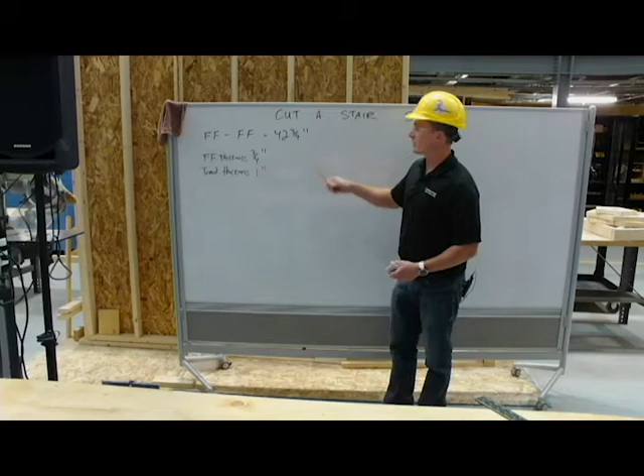Like I always say in the class, I like to draw it out. If this was a problem that I gave to you on a test, I would draw it out so that it makes more sense to me. Then I can write all my information down before I go ahead and do it for real on my stringer, which I got on the bench right here. So let's draw this first, and then we'll go from there.

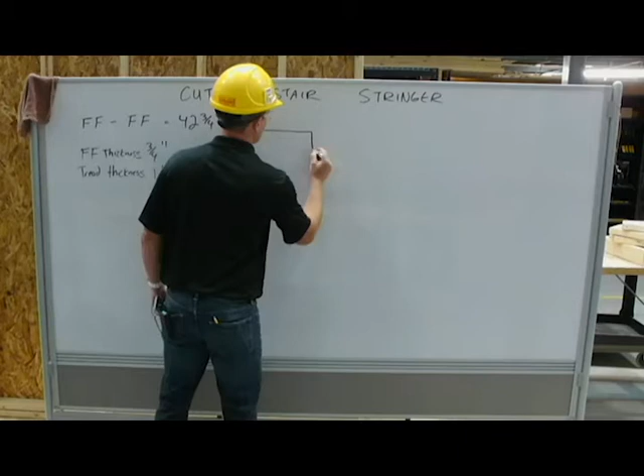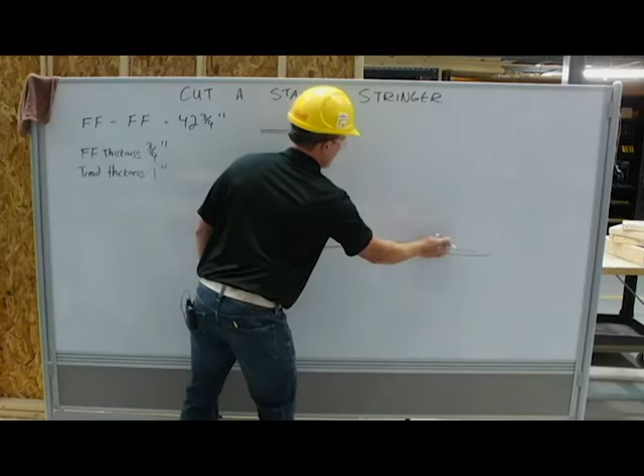So first thing here, here's my floor, including my finished floor right there. And then I'm going down to hit, so this is my subfloor right here, and this is my finished floor right here. My stringer's going to come down and hit down here somewhere. So my measurement is taken from right there, finished floor to finished floor. So top of finished floor to top of finished floor, we got 42 3/4 inches.

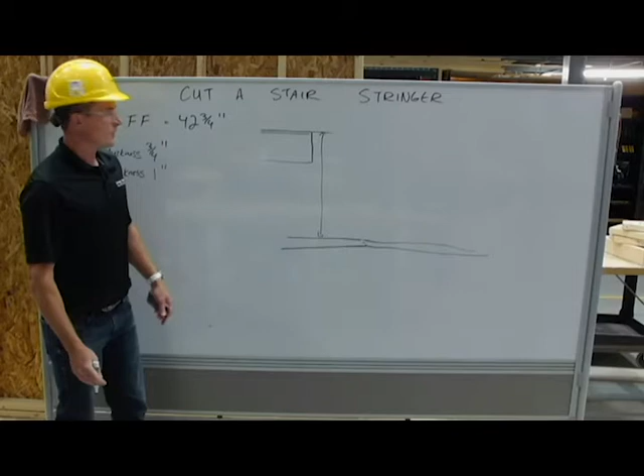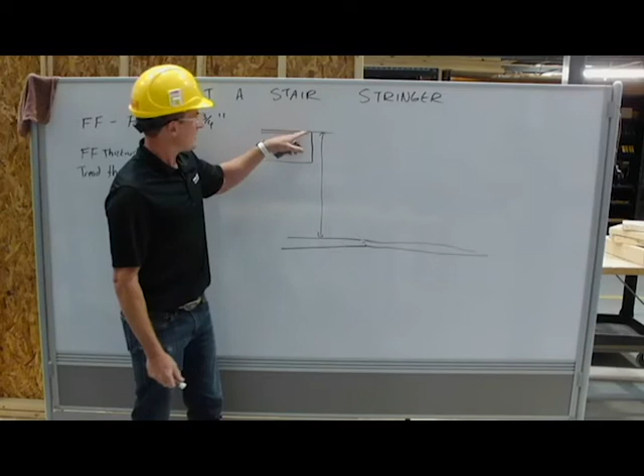So let's start with that as our measurement. And then what we're going to have to do is adjust the stringer for that, because we want the stringer to hit on the subfloor. And then we'll have to adjust for the height of the thickness of our tread.

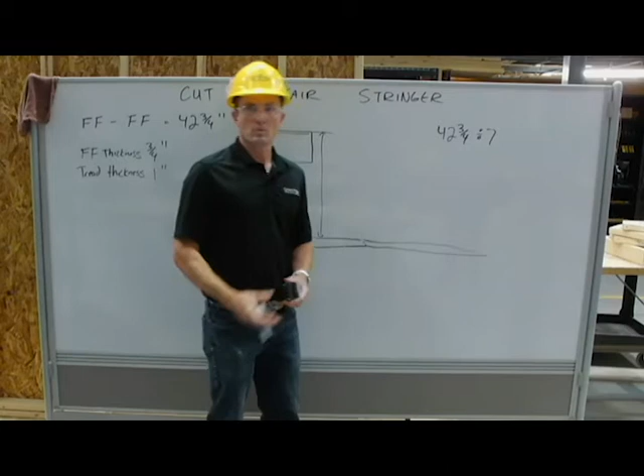So starting with the math, the first step we would do, I'm going to take my 42 3/4 and divide that by 7. Why do we divide by 7? Well, we want to get as close to 7 inches as we can for our unit rise. So I'm going to take that on my calculator and see what I get.

42.75 divided by 7 gives me 6.107. Okay, the decimal place out there, I'm not really too worried about. What I want to see now is that that's got 6 rises. So I want to have 6 equal rises of whatever it works out to.

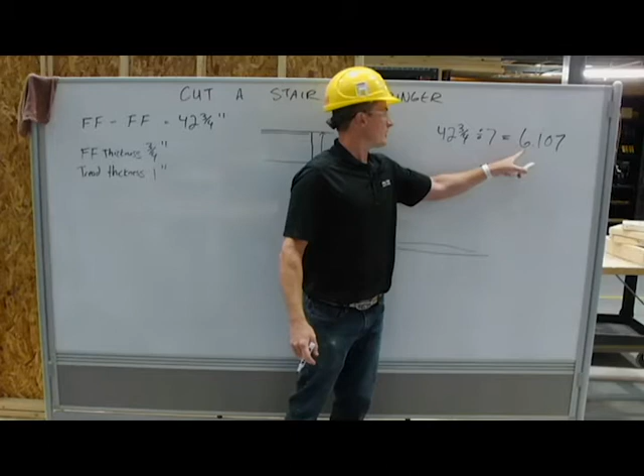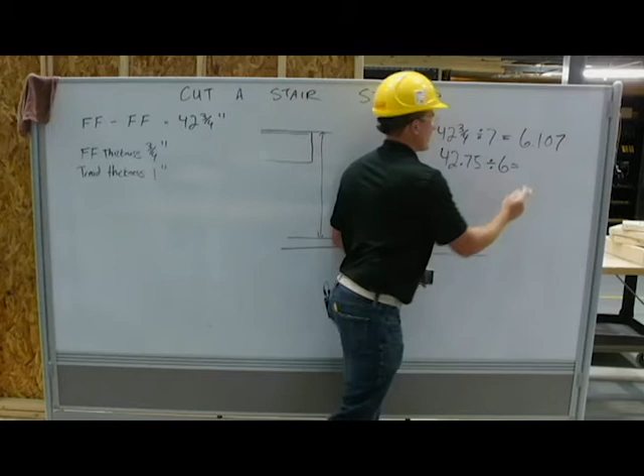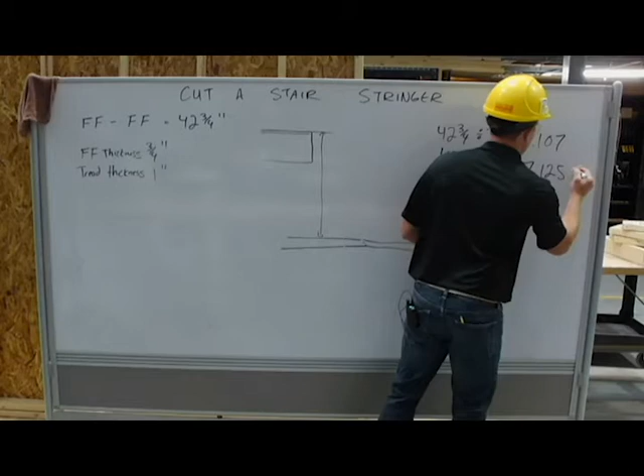So I'm going to take my number 6 and go now with my 42 3/4, 42.75, divided by 6, and that's going to give me what my unit rise will be. So I got 6 rises at how many per rise? I take my 42.75, divide that by 6, and I get 7.125. So each rise is 7.125 inches, and there are 6 of them.

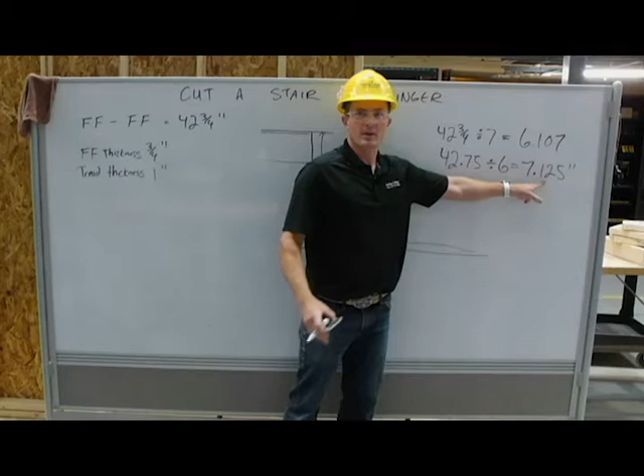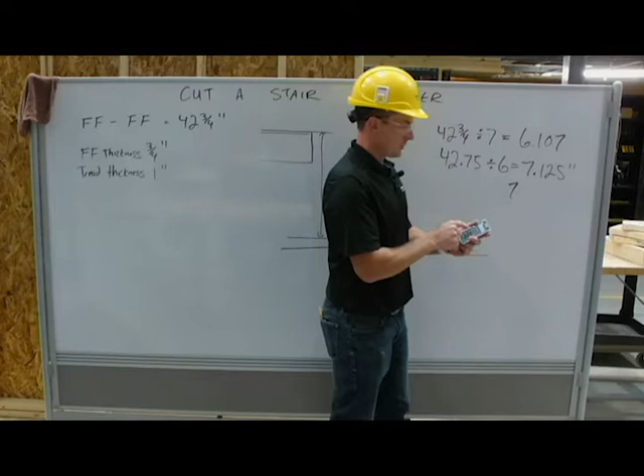So now I would need to convert that into a fraction, which I can actually measure on my board. So I'm going to take my 7 whole inches and take my 0.125 and multiply that by 16, and I get 2/16. So 2/16 is also known as 1/8. So 7 and 1/8 for each rise, 6 rises there.

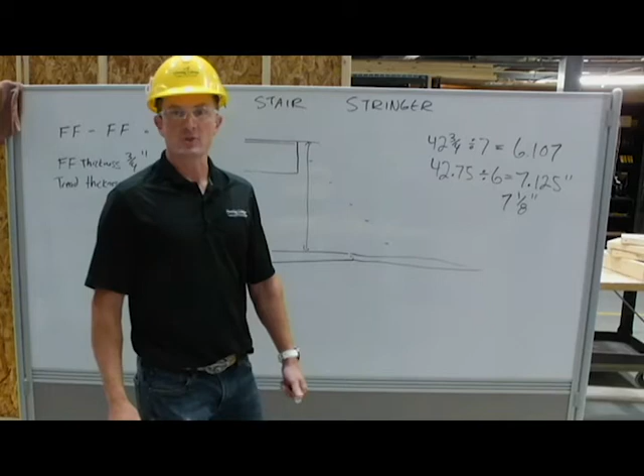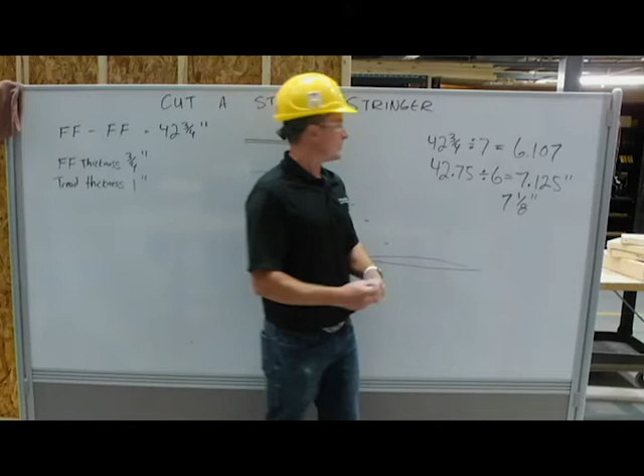Okay, so I want to draw this stringer out here. Like I said, we like to draw this stuff before we do it. And I've mentioned that there are 6 rises, so that leaves us with 5 runs. 6 rises, 5 runs. Okay, so why only 5 runs?

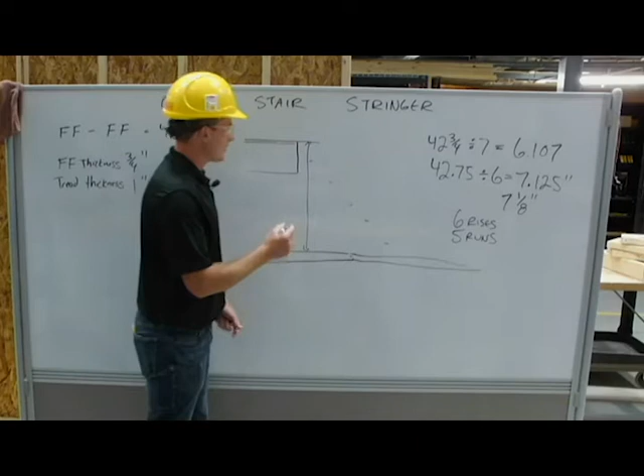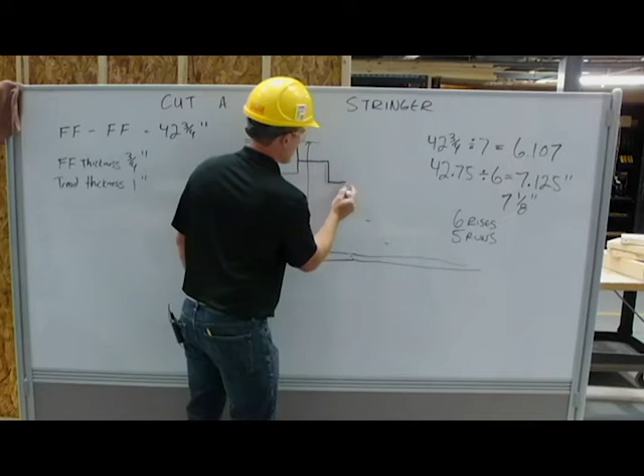Well, let's draw this thing out approximately to scale here so we can see. So here's 1 rise, 1 run. 2 rises... Okay, so now you can see there's 1 rise, 2 rise, 3 rises, 4 rises, 5 rises. The 6th rise takes us right up onto the finished floor right here.

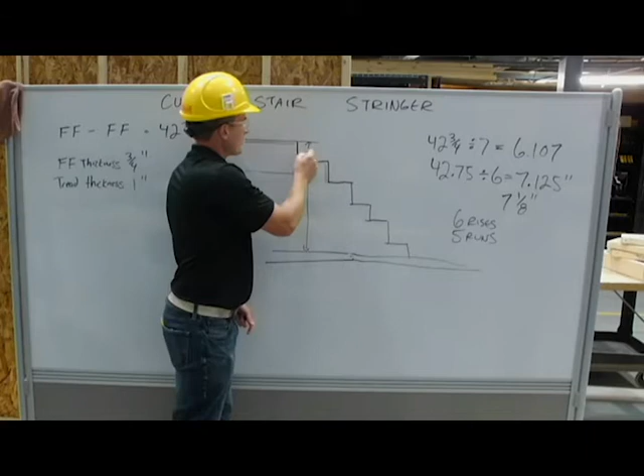Okay, so with that, we don't need a run there, right? I'll take that out there so it's a little bit more clear. So there's 1 run, 2 runs, 3 runs, 4 runs, 5 runs. So 5 treads, because this tread here is not a tread. We just get a nosing at the top at our finished floor height.

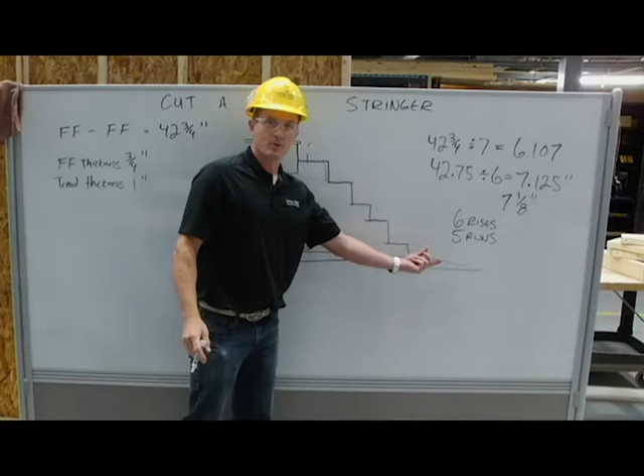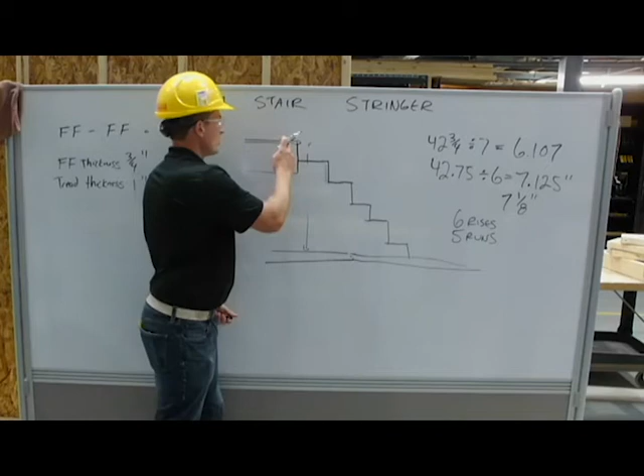There may be a situation where you want to have a run out there. Maybe there's nothing here and there's a landing out here and we got to stretch this out a little bit, but very seldom do we actually have a tread level with the top of the finished floor right there. So usually what happens is we go finished floor, tread, tread, tread all the way down. So now you can see that we've got 6 rises and only 5 runs or 5 treads.

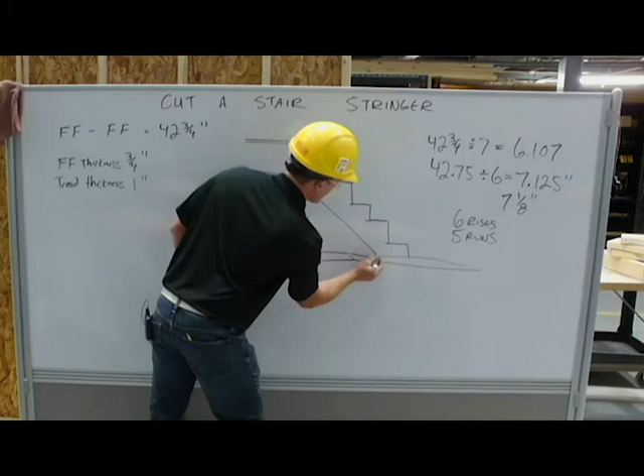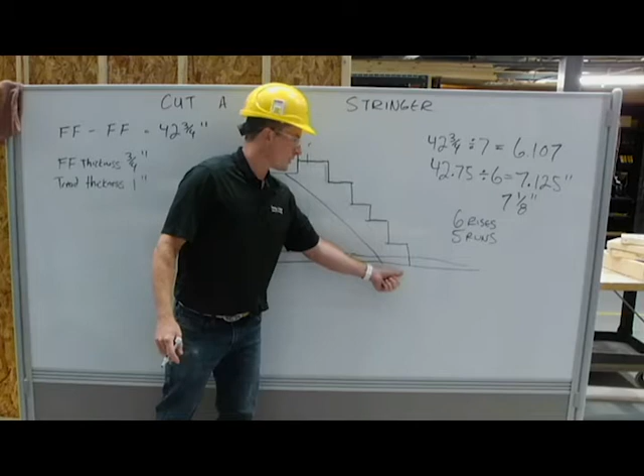This is what we want to lay out. Our stringer is going to go through the finished floor and land on the subfloor. So let's say we're installing this stringer here before the finished floor is down. We want to come all the way down to the subfloor, whether this is concrete or a subfloor down here, it doesn't really matter. But that's where we want to hit before our finished floor goes on top of whatever we're sitting on. So there is our stringer hitting all the way down through there.

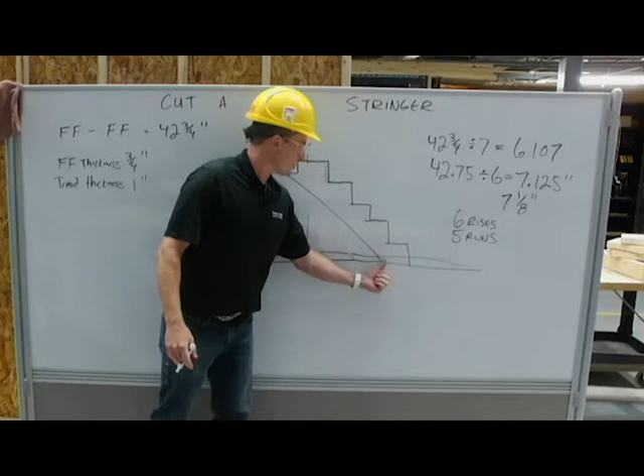All right, so one thing we didn't discuss before we cut our stringer out here is what's the length of our run. So we have a total rise of 42 3/4, 6 rises at 7 1/8 each. So we have 5 runs at what? So we didn't discuss that.

So let's use our rule of 17. The way rule of 17 works, we just take our 17 and subtract our rise from that, and the difference that we're left with is going to be our length of unit run. So 17 subtract 7 1/8 leaves us with 9 7/8. So our 5 runs are at 9 7/8 each.

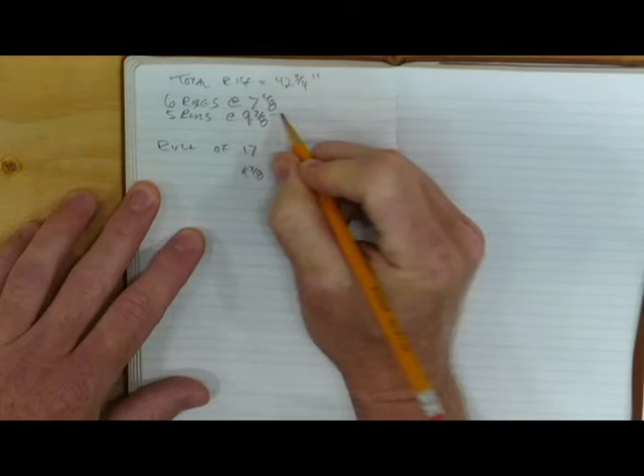Okay, so now we know our 2 numbers that we're going to need to put on our square, 7 1/8 for each rise and 9 7/8 for each run.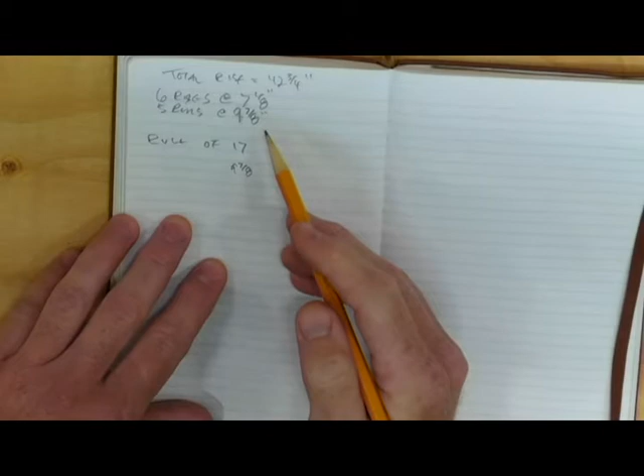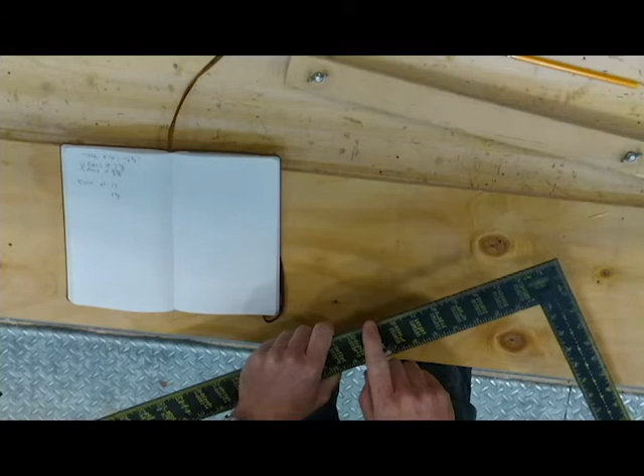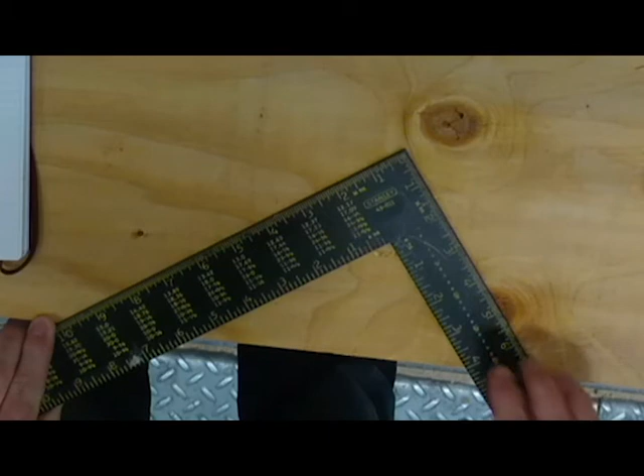So the way this is going to work is similar to laying out a rafter. I've got in my left hand my long side of my square, my level side. I'm always going to have my level part on there, which is my run. So I look at my notes here and I see 9 7/8 is where I'm going to set this side, my left hand on the square at 9 7/8, and my right side is 7 1/8. I'm going to slide that along at 7 1/8, making sure that it's lined up.

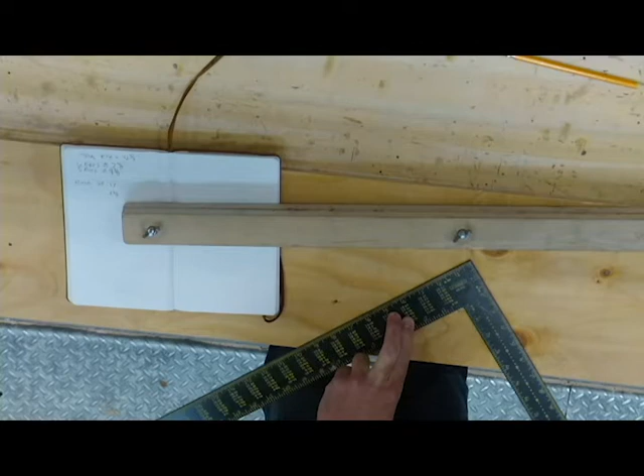You can just hold it and lay out that way. You can put your little square nuts on there, your square dogs or whatever. I like to use this guy right here, and the reason for that is I can slide off the end farther than if I had just my square nuts on it. It allows me to put a run right at the end of my board.

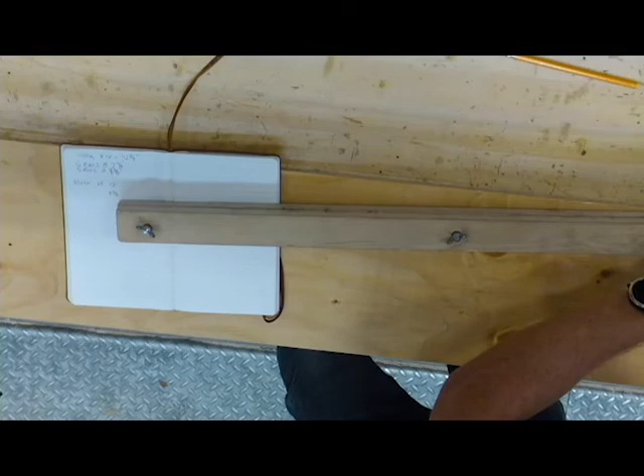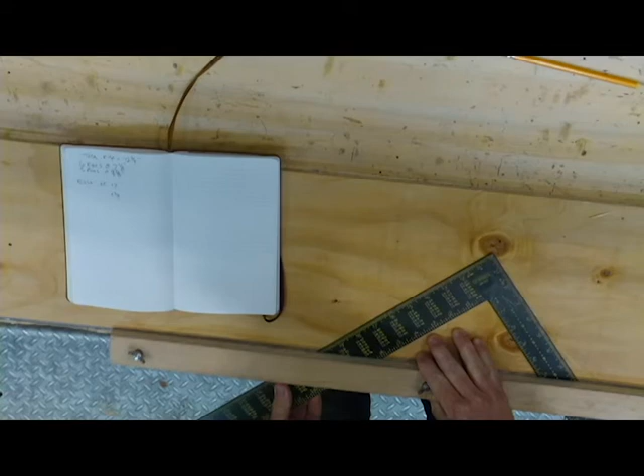So let's just go ahead and set this guy up. As I said, it's not completely necessary to use this. So 9 7/8 we want, and 7 1/8 we want on this end. It's a little hard to read this sometimes.

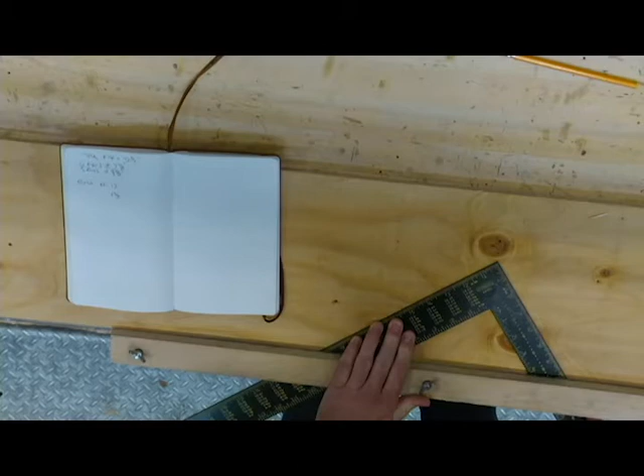So I've seen people make these out of plexiglass. It's a lot nicer, you can see right through it, something nice and clear, but this will get us there.

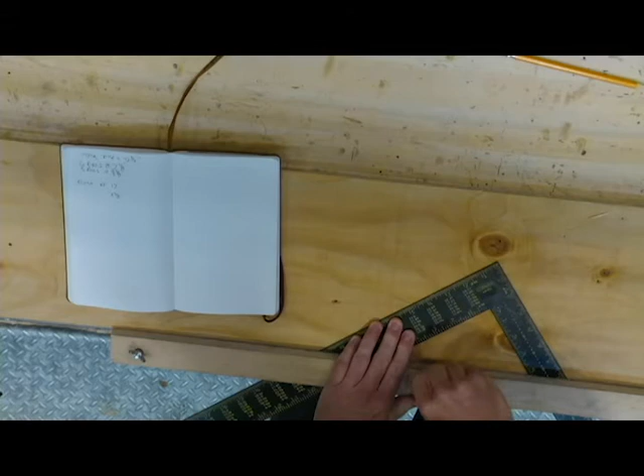All right, so now we have 6 rises. I'm remembering that this is my rise side and this is my run side. So what I'm going to do here is I'm going to slide this board down. I'm going to work at the top on my way down. Here's what I was talking about at the end here.

Why I like to use this sort of a fence setup. If I wanted to get a run right at the end here, if I didn't have this fence, I wouldn't be able to set it up that way. This part obviously would be off the end and it'd be all over the place. But now that I got this fence, I can put a run anywhere I want.

But I'm going to start with my rise. I'm going to put my first rise at the end of this board. I'm just going to lay it out. So if this is a stringer that I'm going to keep, I'm going to mark in here that that's 1 rise. I'm going to mark in on this side here because this is a part I'm cutting out. If I mark it out here, well, I'm probably going to cut that off after actually, because that's where it's going to hit up against my upper construction.

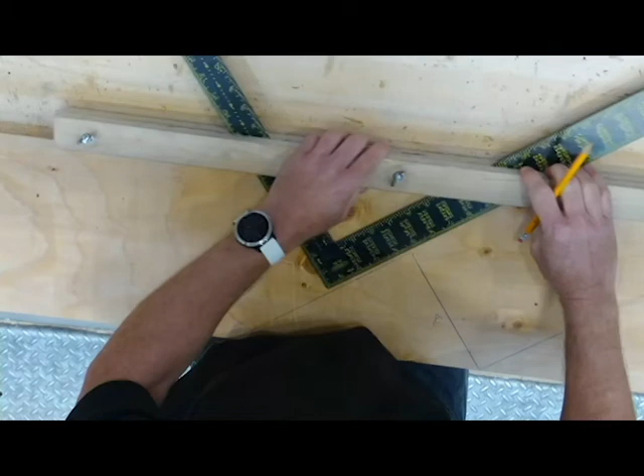So what I want to do now is transfer this, bring it all the way across. I can use my square somehow, like this, on the other side of my board, to continue that line across. This part of my stringer here, which I just messed up, but this line here, the first line, is where we would want to cut it if it's going to sit right down and land on the floor.

But we have to adjust here. Here's my first rise, and all of these rises are the same, this is 7 1/8 from there to there. But if I'm cutting this out, this is a cut stringer now, if I put on top of here 1 inch of rise, which is what my tread will be, because that's what my plans say. I got a 1 inch rise or 1 inch thick tread. So I had an inch here.

Now my first step from here to the top here is going to be 8 1/8, and the next one's fine, because if I bring this up an inch from here and this one up an inch, then my total rise is still 7 1/8, but this is where it makes a difference right down here. So we have to adjust our stringer for that. So if I'm adding an inch here, I have to take an inch off the bottom here. So at this point it might be easier to use my square off, but what I've done is I've lined this up here.

There's 1 inch of rise here, which I'm cutting off. So I'm going to draw that across there. So there's my 1 inch, allowing for my tread thickness here.

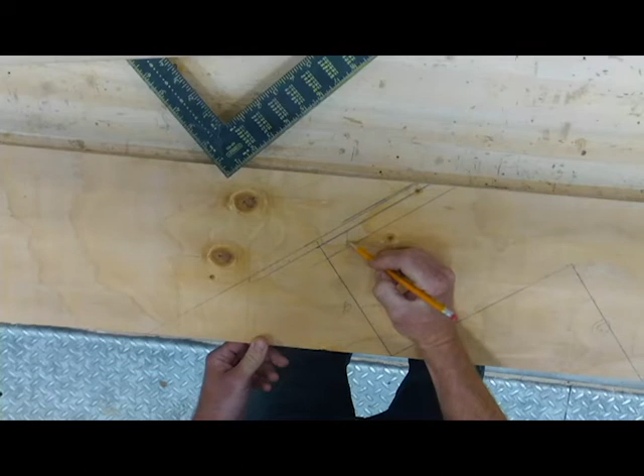Okay, now yeah, there's a shortcut for that. We could have added our tread thickness and subtracted from our tread thickness the finished floor thickness, and what we're left with is that 1/4 of an inch right there that we're taking off. So yes, we could have mathed it, but I just laid it all out so we could see exactly what's going on here.

So this is cut out, this is cut out, so is this, so is this, so is this, and then up here we have to do a few things. So this is also cut out. So this is our last rise, where we step up here onto the floor. So it depends on what sort of finish we've got, where this ends up hitting. Then I'll show you on our drawing where this ends up.

Okay, so now we need to talk about how we're going to complete the top of this stringer. So a couple of things that we have going on here. This is our upper construction. We have 2x10 floor joists. We have 3/4 inch finished floor. So what we need to do is figure out the difference between this whole assembly and the distance from top of finished floor to the top of our stringer, which is what we laid out.

All these lines here that we have laid out are our top of stringer. We add on top of that your tread after, but we're not concerned about that. So we have this point drawn and laid out on our stringer currently, right there. So the distance from here to here is 7 1/8 plus 1 inch, so that total distance is 8 1/8.

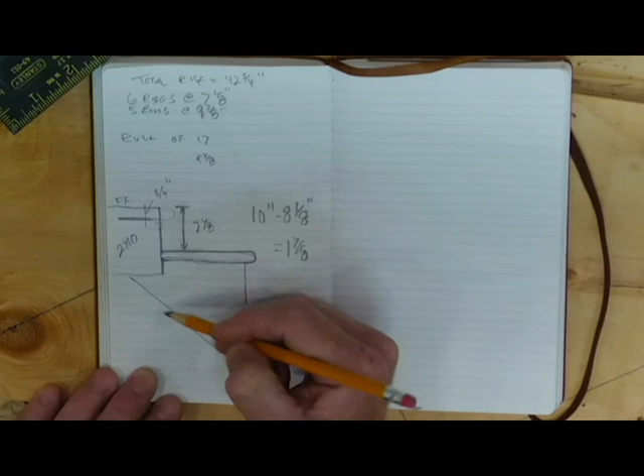So 10 inches total, and we want to subtract 8 1/8, so that leaves us with 1 7/8. So 1 7/8 is how much this measurement is right here that we'll be cutting out and laying it out straight across here, so that again, when we install this, this hits up tight against there.

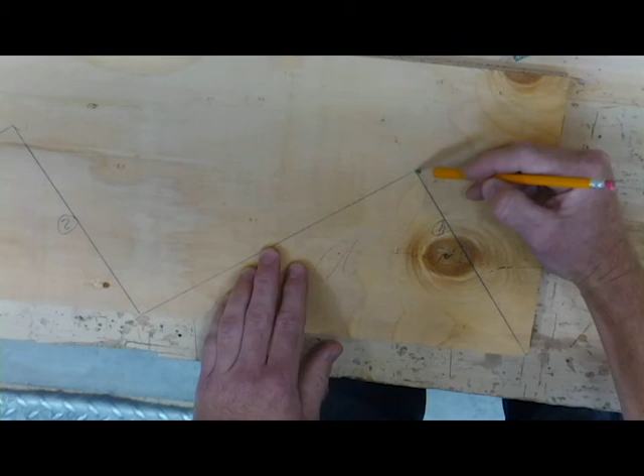All right, so here's our top tread and our final rise before we hit the finished floor up here. So we know already that this is 7 1/8 to here, and we calculated on our math right here that we need to go 1 7/8 beyond that. So we're going to take that 1 7/8 out of here and then square it back across here, so we end up with a nice look there.

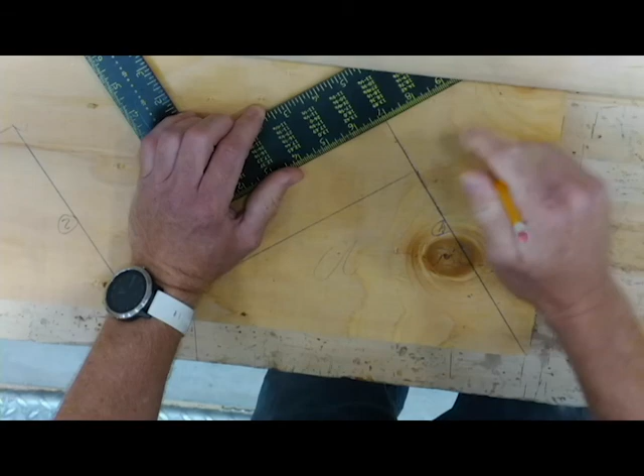So I'm going to use my square here. I'm picking a 3 there, zeroing it at the 3. There's my 1 7/8. I have to extend this line down, so I'll draw that like that. There's my 1 7/8 mark. Slide my square along here, hit this, and bring that across like that.

So now we can see that this is the bottom of our 2x10 joist, is going to hit right there. All we need to do then is push that up when we fasten it on. We can worry about our risers and whatnot later on, but that's a basic look of our stringer, and we're going to cut it all out.

This is all cut out here. Now, use your circular saw to cut in and stop in those corners, and then you finish that off either with a jigsaw or your hand saw. I prefer a hand saw myself, just because the curvature of the saw is not going to get right in to cut that off, especially if we're working with a 2-inch stock as opposed to this thin piece of plywood I've got here.

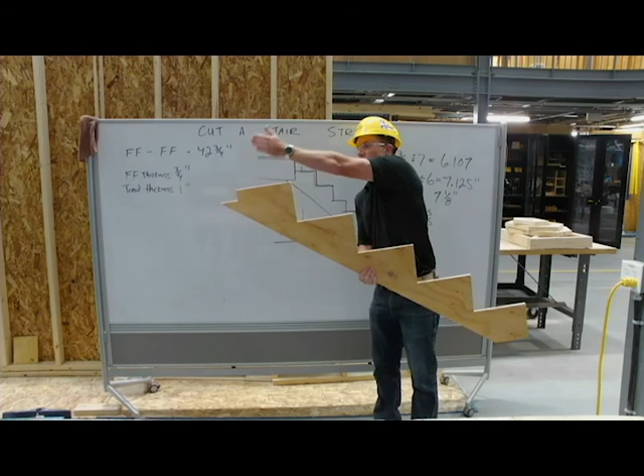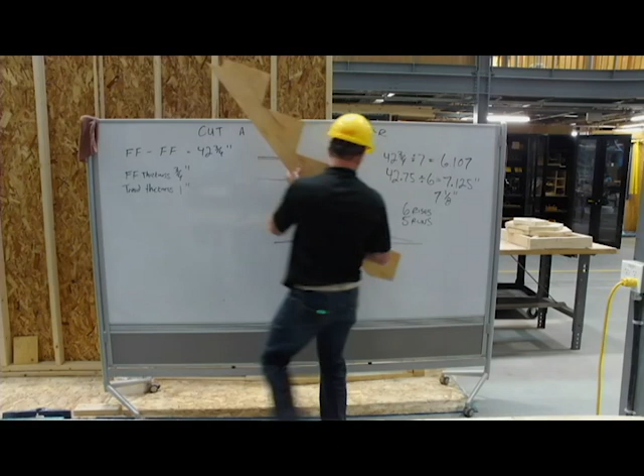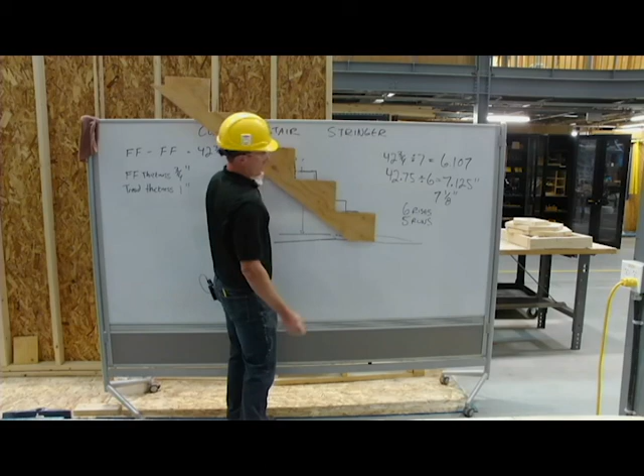So here we are with our finished stringer. You can see that there's 1, 2, 3, 4, 5, and the 6th rise is to the finished floor. There's our little notch to fit around the header, it goes right in there. And then we modified the bottom to fit right onto the subfloor and lengthened it for the thickness of the finished floor. We also shortened it for the thickness of the tread. And that's it.